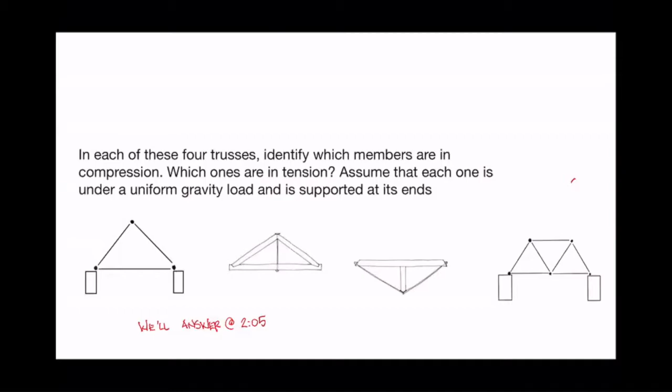The question this week is, in each of these four trusses, we want to identify which members are in compression, which ones are in tension, and we're going to assume that each one is under a normal gravity uniform load, and each one is supported on its ends, even if I haven't drawn it as such.

Before we get to that, let's talk a little bit about the Scottish Parliament. Many of you know this building. It was designed by Enric Miralles. It was actually quite controversial, and it's just now getting its due among the Scottish populace, which at one point had voted it number 5 in buildings they'd like to tear down. It was not very popular when it first opened, for all kinds of reasons.

It was controversial because...

Thank you for wishing me happy birthday, Paige. I'm not quite sure how you knew it was my birthday, but I do remember mentioning it on one of the videos when I was talking about where the sun is. So yes, today is my birthday. I don't usually get distracted by the chats, but I was kind of freaked out when I saw happy birthday. I was like, how did she know?

And then I remembered. Anyhow, the Scottish Parliament, this building was actually quite controversial for all kinds of reasons. One is, about 300 years ago, the government of Scotland as an autonomous entity was dissolved and incorporated into Great Britain, and all parliamentary decisions were made down in London. In 1997, Scotland had a referendum, and they wanted more autonomy, part of which was making its own parliament. So for the first time in 300 years, they needed a building for Parliament.

And because it's a modern Parliament, and because we like to have everyone in one room, and because we don't like to have columns in the middle of these big open spaces, we're going to have a roof with a series of members in compression and tension, and we're going to use that to effectively increase the span of the building, and to effectively decrease the thickness of the beams of the building.

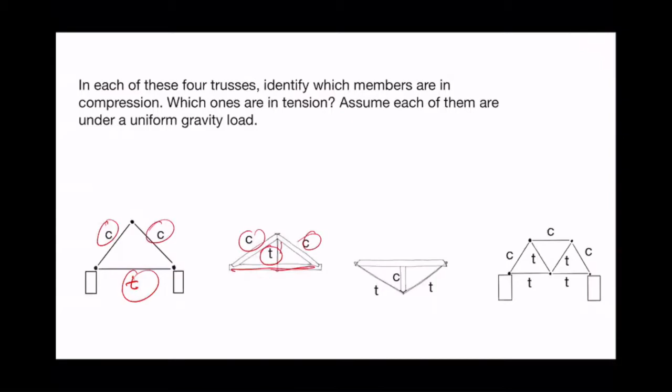Tension, tension, compression, tension, tension, compression, compression, compression. These are tough. Tension, tension. That's the most difficult one. Most of these I think are pretty easy for architects.

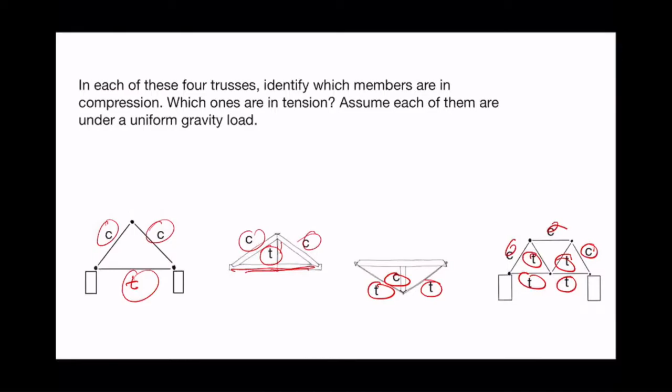Generally, in my experience teaching architecture, three-quarters or more of you kind of see it. You can just look at it and see what's in compression and what's in tension. I'll give you some tricks for figuring it out when you can't see it. But generally, we can kind of see which things want to be squished down if left to their own devices, and which things want to be elongated if left to their own devices.

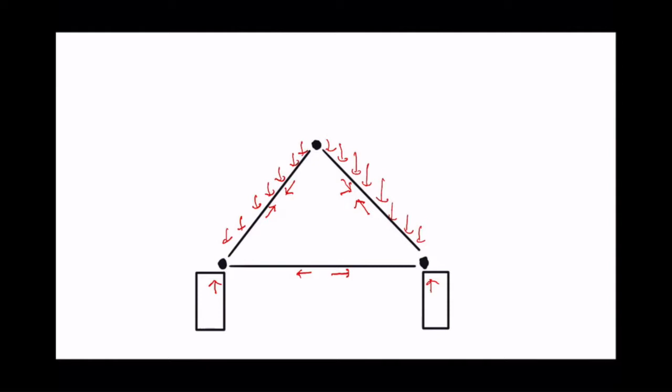And then this piece on the bottom is actually quite important. You probably know that it's pulling apart. If you don't know that, just kind of picture it without it. If you didn't have it, this whole thing would kind of flatten down quickly. Or maybe it would even sag down. So this element here is holding it all together, and so we say it's in tension, and we draw it like this.

Now anytime we have the weight above an element like this, if this is a beam, we're going to add what's called a compression strut, or just a strut. A strut is one of those words you've likely heard, but some people are afraid to ask what it means. They've heard it in the context of vehicles, in car design, and in structural design, like a gusset plate or water table - things we hear a lot and assume others assume we know. But a strut is just a short structural member that's in compression. So if you were to support some kind of weight, you would put a strut here.

And a strut has to be kind of rigid, like it has to be something with some thickness.

You can imagine that it can't be something like a cable, because a cable would just flop down and the weight would just crash down on the beam. So if you see anything like this, it's a strut, and it's going to be in compression.

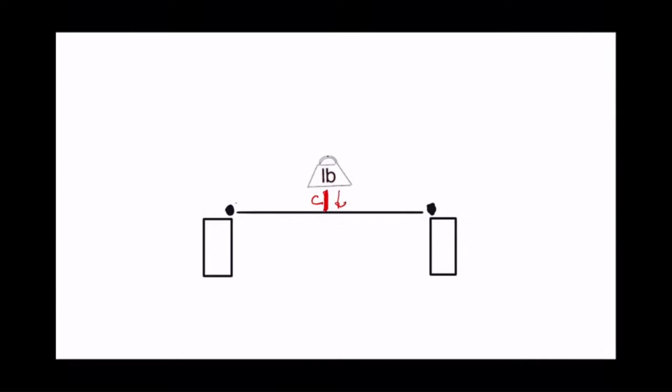If you see anything like this, it's hanging. That could be a structural element, like a piece of wood or a piece of steel, cold rolled steel or something like that. But it also could be a cable or a thin rod, and it would still work out. We couldn't make this a thin rod because it would buckle. We couldn't make it a cable because it would collapse.

But this, we can make a cable. You can imagine it just kind of swings that way. So that element right there is in tension. I don't know the equivalent word for tension - strut is to compression as blank is to tension. If you know, there's probably a word, you can put it in the chat, but we can just call it a tension rod. So we could put a tension rod there in the same way we could put a strut here.

Now, if we have just a straight up beam, you know that once we load it, it's going to want to sag like this. And what's going to happen is there's going to be a bending moment, and that bending moment is going to be at its max. If this is a simply supported, uniformly loaded beam, it's going to be at its max at the midpoint of the beam.

And what's happening there in the beam is if the beam looks like this, it's going to want to be in compression on the top. So in the top we have forces pushing together, and in the bottom we have forces pulling apart, and so it's going to want to split at the bottom, and it's going to want to kind of crush together at the top.

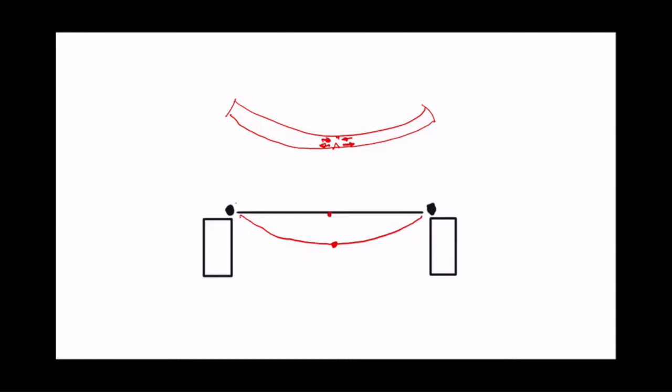And that's really what's going to dictate. So we say the moment dictates the beam, but in reality, it's the tension and the compression inside the beam, caused by the bending moment, that's going to determine, going to govern the thickness of the beam. So you can imagine that if we could somehow support that beam here, then our maximum moment becomes here and here, and that's a big difference because now our span is only this, and our maximum moment is based on the square of the length of the span.

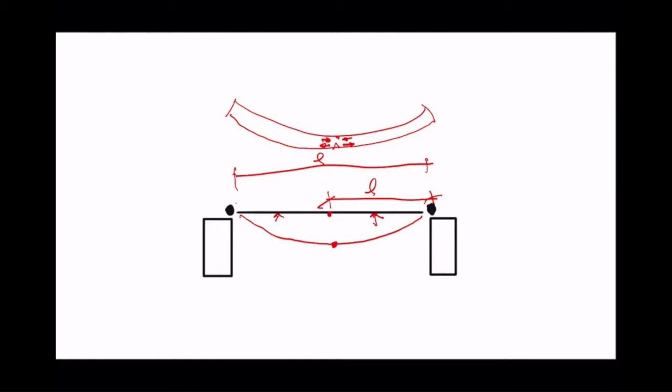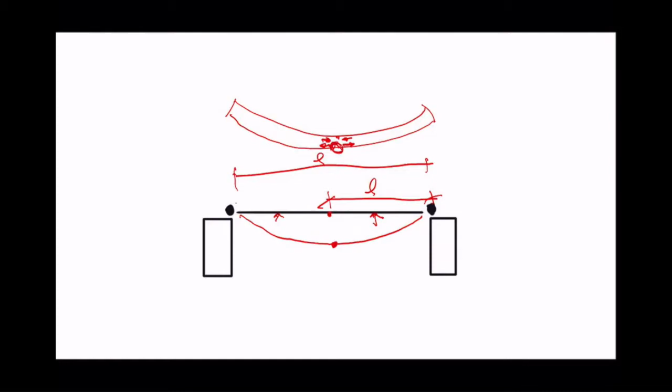So if that's the length of the span, it's based on the square of the length. Just like originally our length was here, that length, and that is twice as long. Well, twice as long doesn't mean twice the moment because the square of 2 is 4. So actually twice as long of a beam, assuming all other conditions are held constant - uniformly loaded and simply supported - twice as long of a beam is going to be 4 times the maximum moment, which means 4 times the urge to rip apart at the bottom in the middle, and 4 times the urge to squish together in the top.

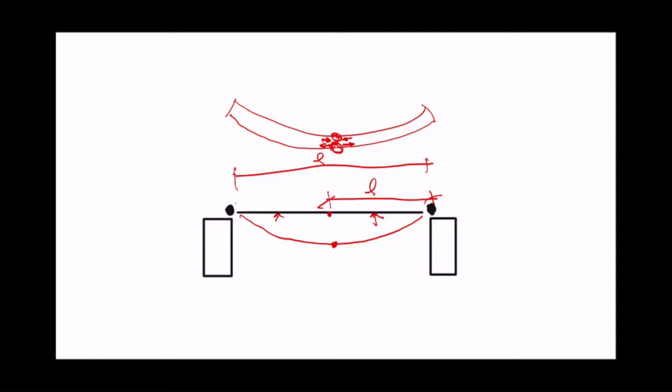So if we can cut the length of the free support, kind of the free body, the free beam, in half, we're actually not just cutting our moment in half, we're cutting it to a quarter, and we can span farther and/or have a thinner beam. And that's what these two beams are about that you saw. So this one, you can see it's in tension because it's a rod, so you can just tell that's in tension, and that's in tension, and that's a compressive strut. And what it is, it's essentially like think of it as a hammock.

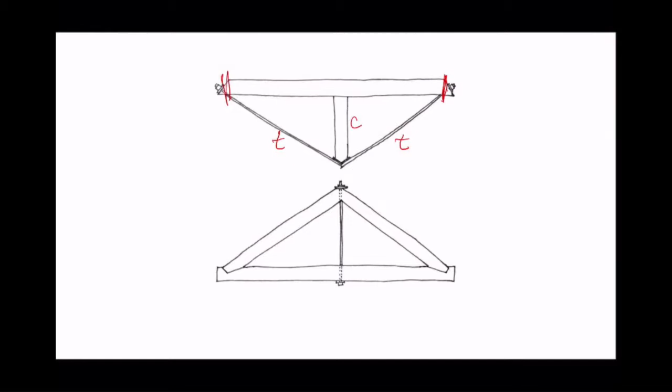So you have this beam stretching from here to here, and its maximum moment is going to be right in the middle. So what we're doing is building a hammock on the ends, and putting the whole thing in tension using a turnbuckle. A turnbuckle is a way to tighten things down—look it up if you don't know. We'll spin the turnbuckle, tightening this element and this element.

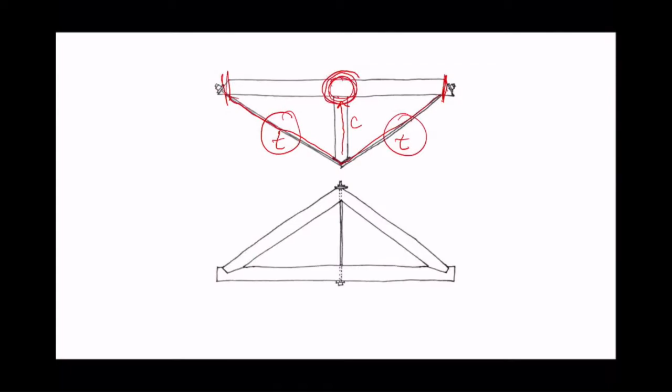As we tighten it, we're pushing this strut up, supporting it mid-span. So our maximum moment is greatly reduced because we no longer have that sagging point midway. Likewise, in this truss, this element's in tension, this one's in compression, and this one's in compression.

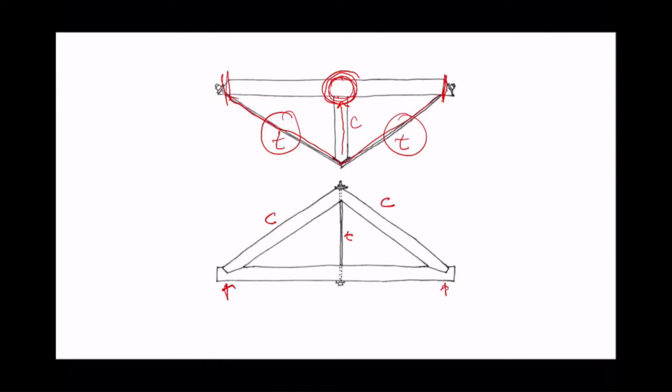It's going to span, and this is not totally unlike a gable truss. The idea is if we're spanning from here to here, the midpoint is propped up by, in this case, something like a teepee on top, and then we pull up using this tension rod.

We tighten it with the turnbuckle, or just turn the bolt or nut over and over with the washer until it gets tighter and tighter, actually pulling the midpoint up. By pulling it up, we've reduced the maximum moment that otherwise would have formed in the middle of the span if it were just a simply supported beam.

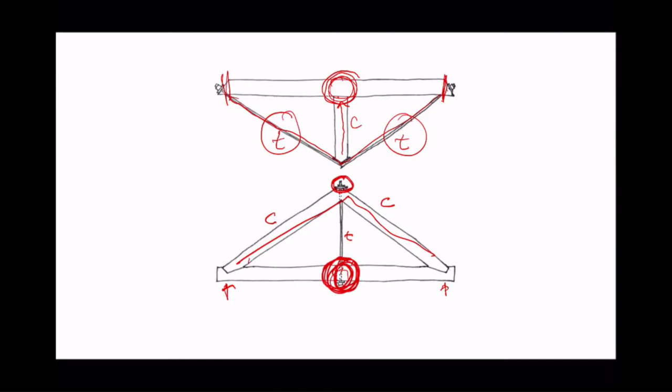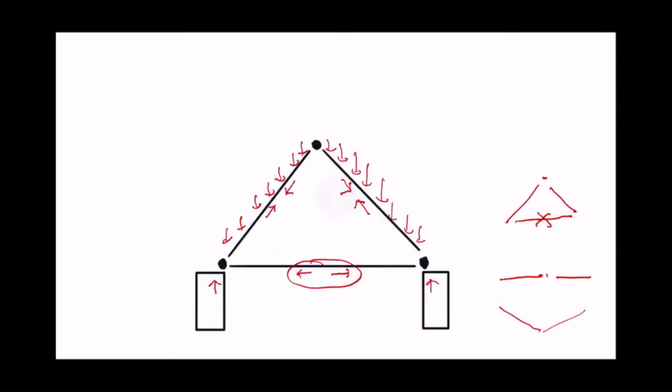Now this looks like it's a truss. It has the general idea of a truss, it certainly looks a lot like our truss back here—let's see if we can find it. It looks like this one, but it's not a truss, and it doesn't behave like one either. So what's happening here is there's not really a truss going on.

We just have a beam here, a beam here, our rafters there, and this beam here is called a ridge beam, if it was a roof. So how is this ridge beam supported? How come it doesn't just flatten out like we talked about, without the kind of bottom chord that normally would have gone here?

The reason is because in elevation, at either end of this ridge beam, back here there's a wall, and that wall, or maybe a column in that wall, supports that end of the ridge beam, and the other end is supported by the end wall on the other side. So the ridge beam supports all the rafters, and those rafters behave not as elements in a truss, but rather as simply supported beams.

Now this was a tricky one—really tricky, and frankly probably a bit more difficult than what you're likely to find on the exam, but we can run this one out too. Let's run it through: we have the loads coming from the top, and the resistance to the loads coming from these piers on the bottom.

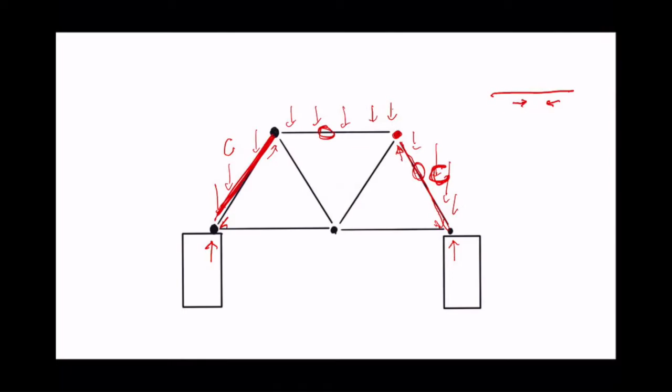And then our next question is, what's going to happen to this beam right here? Well, let's figure it out. This element right here pushing on the hinge, I'm going to kind of move it out here. That element right there, I'm making it bigger too so we can see it.

That element right there, that vector, is pushing up on the hinge, and we can break that down into a vector that looks like this plus a vector that looks like this. So we can break it down into that.

And because it's a vector that looks like that, we can see that if this one is pushing to the right, and this one is likewise pushing to the left, that this element here is in compression. So this one right here is also in compression.

Now, likewise, at the top here, we can kind of tell that these two, whether they're in compression or not, they're going to cancel each other out just because of symmetry. So on the ends, that becomes more important.

And again, we have something that looks like this. And we can break that down into something that looks like this and something that looks like this. And because it looks like this, it's pulling apart in this plane. And so this is going to be in tension, and this is going to be in tension.

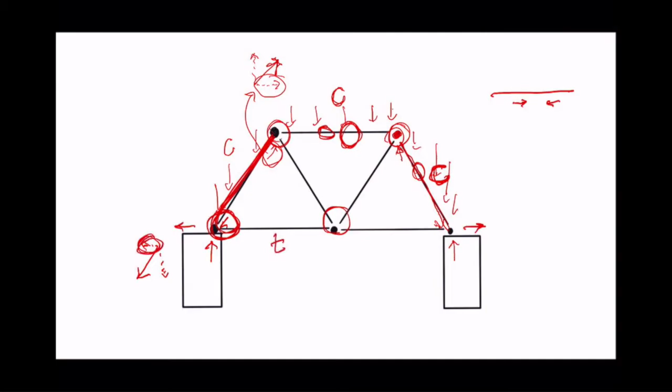Now, when in doubt, the top outside is almost always going to be in compression. And I say almost always because you never know if there's some kind of weird eccentrically loaded wind force or snow drift or seismic force, or there's a really heavy chandelier being suspended from one side that makes the whole thing behave weird.

But almost always, everything on top is going to be in compression, and everything on the bottom is going to be in tension. Just like we saw, just a version of essentially this. All right.

Now, the middle ones are a bit more difficult, but we see here that this is making the hinge go that way, and this is really kind of pushing it up that way, I guess would be a better way to put it. And this is making this hinge push up that way.

And so because of that, these are going to be in tension as well. And again, when in doubt, the middle ones are often, not always, in tension, but we'll just go ahead. If you're totally stuck on an exam and you don't have time and there's something this complex, that's what you would say. But again, I don't really think NCARB is really interested in this kind of complexity.

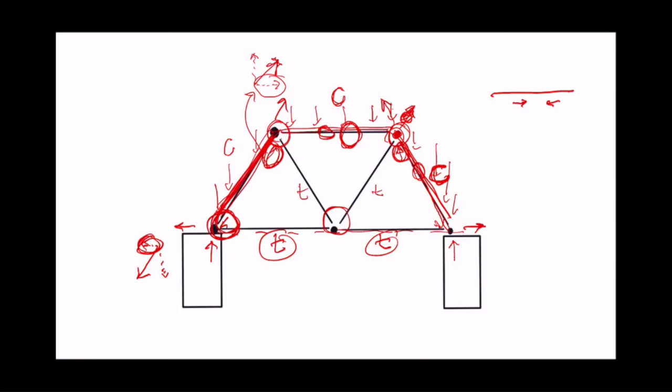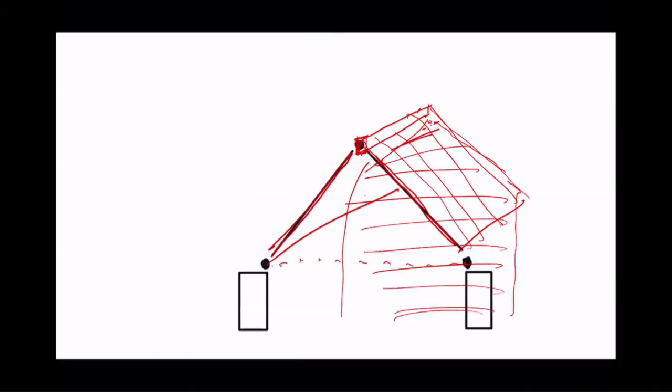I think they just want to make sure you can see the obvious, the easy slam dunks - when an element is a cable, when it's clearly in compression or tension, or when something is hanging, or when there needs to be a strut. That's the level of competence you need, and I'm guessing most of you are there.

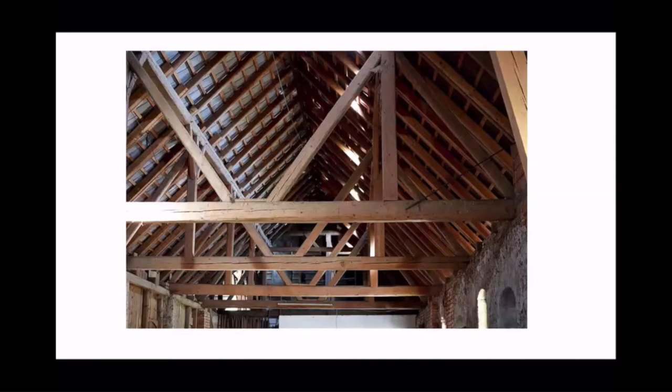In practice, you can sometimes see - and in this case it's a little hard to tell if this is in tension or compression. I think those are probably in tension for all the reasons we just discussed. But sometimes it's very easy: you can see that thin members like cables or rods are going to be in tension. Here's a great example of a strut in architecture.

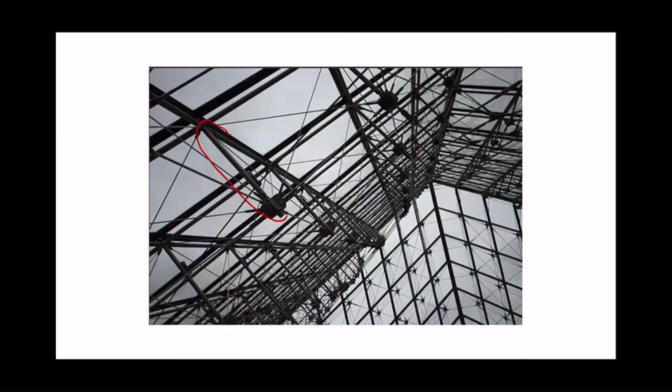So that's a little compressive strut - all struts are compressive, as far as I know. There's this tensegrity cable net that's pulling everything back, allowing these struts to support the roof without needing a giant truss blocking the middle.

You could imagine there'd be a truss going across, but in this case we want to keep this greenhouse free of that so we can bring in as much light as possible. Likewise, you've certainly seen these.

This is a skylight, but we sometimes see them on vertical elements as well - a series of cables acting as hammocks, and the hammock pushes up on each strut. The struts come out in these spiders, and those support the glazed elements.

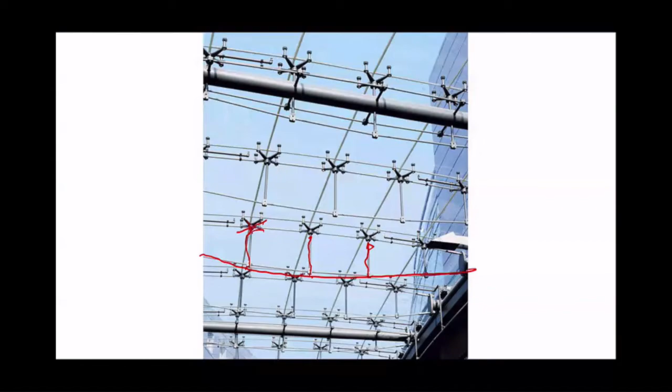All right, for next week, here is your question. Again, it'll be emailed to you. If you're not on the email list, email us at firms@amber-book.com - that's firms@amber-book.com.

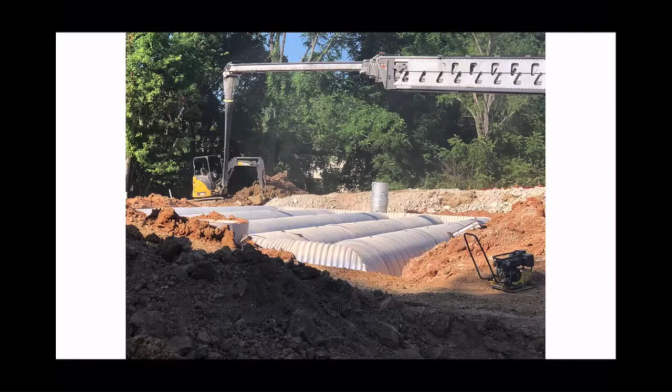Which brings us to our next question someone asked last time: is it a change order if it does not affect money or time? Yes, it could just affect the design and still be a change order. For instance, I took this photo the other day - it's an underground cistern for a parking lot that's not even that big.

So the idea is that the runoff from the parking lot is not going to go right to the stream and cause erosion and cloud up the water and cause all kinds of problems. What we typically require in the last 30 or 40 years is for each site to handle its own runoff. One way to do that is an underground cistern. Sometimes it's a big tank, but this one is just a series of giant pipes welded or sealed together.

This network of giant pipes becomes the underground cistern. You can see here and here there's a manhole to go in and clean it out or unclog something. In these giant pipes we store water during a big rain event, and then downstream there's a little valve, a faucet, that we open just to drip, and it slowly drips out.

So even if there's a big rain and we no longer have soil to absorb it, because it's now an impervious surface, pavement - and I don't think pervious was a word, but I've since seen pervious used, meaning non-impervious. There was no such word in the dictionary years ago when I looked it up, just impervious. But anyhow, there's going to be an impervious parking lot.